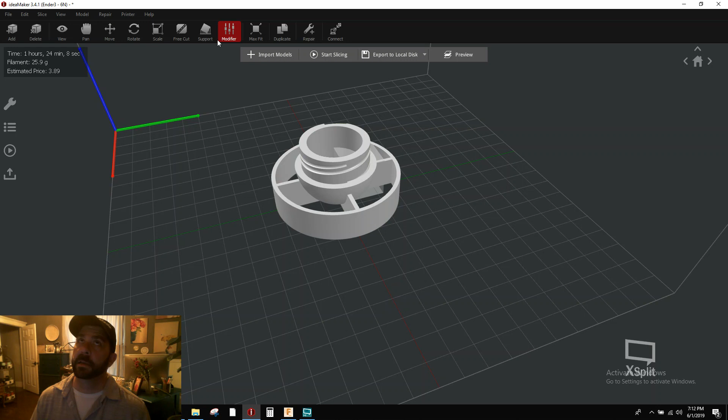One thing we're gonna talk about in this video is this modifier. It's similar to if you come from the Cura world, Cura, whatever they call that thing, I call it Cura. They have that concept of modifiers, and that was their way around doing custom supports. Now Ideamaker obviously already does custom supports, but what the modifiers let you do is apply different settings, let's say of infill, layer heights, or whatever, to an existing model using modifier shapes that go inside your current model.

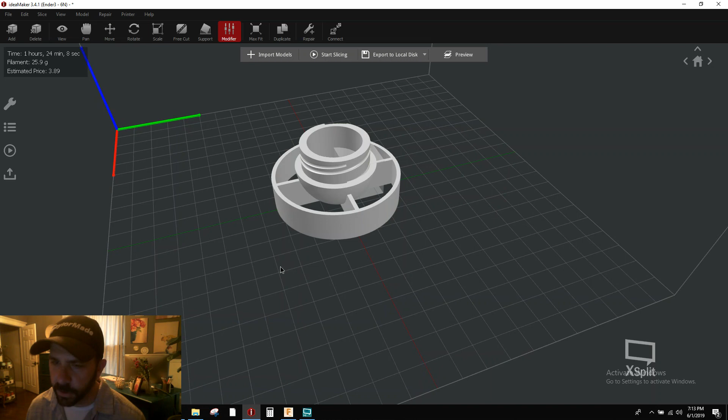So I'll show you this. Let me highlight this guy, let's delete him. So here's this little base thingy I got here, it's for like the bottom half of like a bomb, that screws together. Do I have it here? I don't have it here. Anyway, doesn't matter, this is the model.

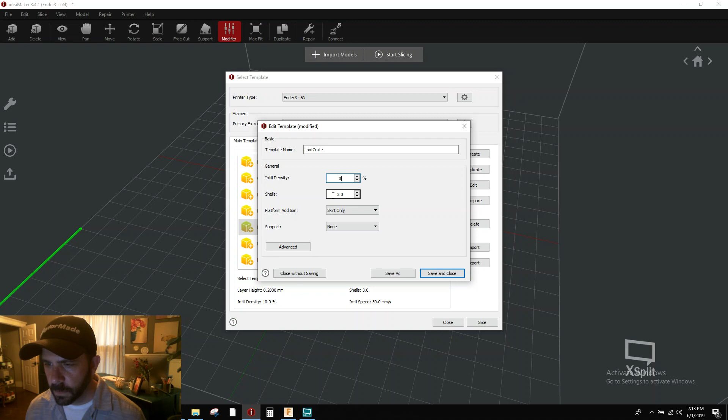So if I were just to slice this and use my standard loot crate template that I've got here, 10% infill - actually let's do 0 infill just so you can see - 3 shells, all that good stuff. Don't care about anything else at this point. I'll slice it.

Let's take a look. So now you can see there's a couple of layout changes as well, we'll touch on those as we go. The preview button is still here once you get your estimated print results, and you can still hit the preview button. The main difference is you don't get the separate pop-out window for your print preview - it's all contained in one, still in your parent window.

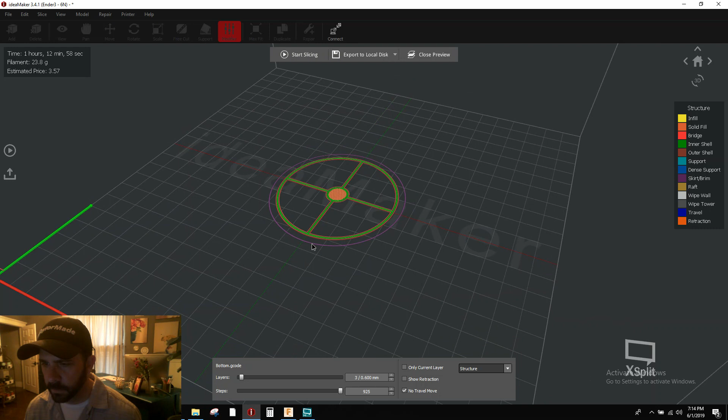So this is what it'll print out like. Again, 0% infill, 3 shells. If we scroll down, you'll see as we get down here, there's no infill there, right? It's just blank, it's just a void, nothing down there, nothing up my sleeve, all that good stuff, okay.

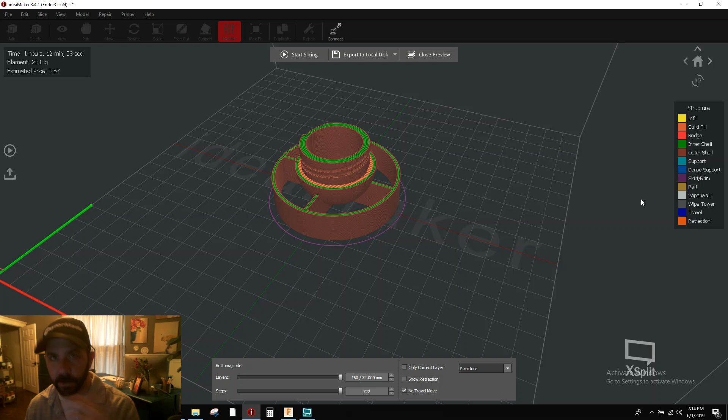So that's totally fine. The other thing you can do here is change the type of view you're looking at. So here we're looking at the actual physical structure of the print, and the different colors signify if it's infill, inner layers, outer layers, support material, all that good stuff - that's what your colors represent. If we change this to your layer heights, this represents which layer height you're printing at. I'm printing this at 0.2 theoretically in this case, so everything is just blue.

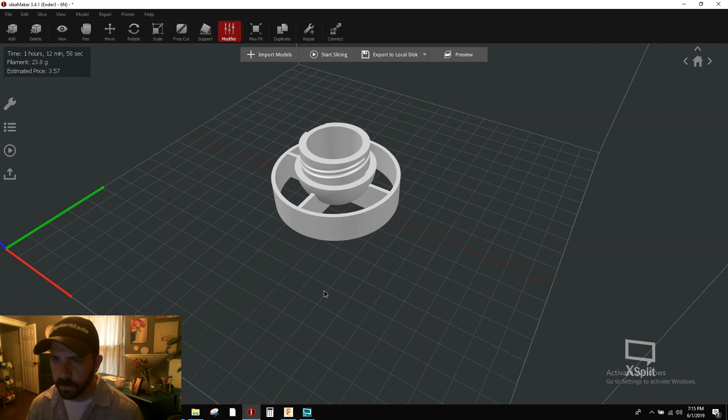Now in the next video when we talk about adaptive layer control, we'll see how this makes a difference. So there we go, we're going to close this for now. And so now what we're going to do is add a modifier. If you come up here, select our model, hit the modifier button, we now have the option to add some modifiers.

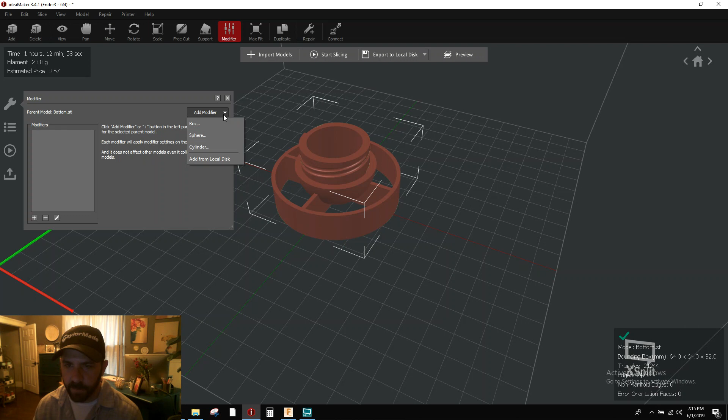You can hit the plus buttons here, and what that lets you do is pick your own STL file to include as a modifier. If you don't want to do that, you can go over here and say add modifier, and add a sphere, a box, a cylinder, whatever you want to do.

In this case, we're going to add a box. I'm going to leave it the default name, and make it 20 by 20 by 20 millimeters. So now it throws it out here.

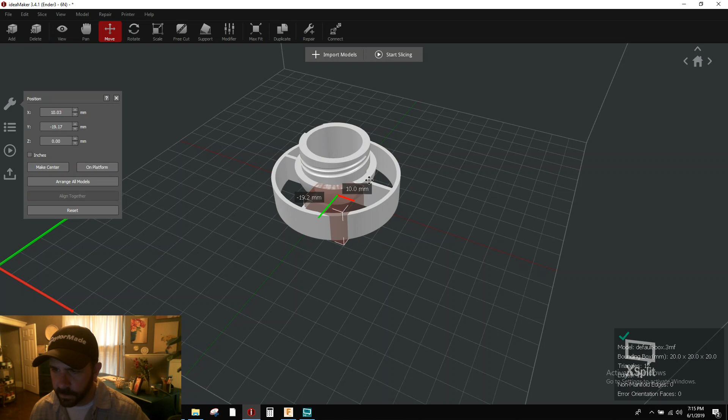I'm going to go to my move button, and I'm just going to drag this anywhere in here. Yeah, that's fine, it's perfect. I'm going to go back to my little modifier settings.

So now the type here is, what do you want to modify? Do you want to modify your support structures, meaning maybe modify them with some different settings, or do you want to actually change the print settings of the parent model with your modifier settings? Where your parent model and your modifier model overlap is where these alternate settings are going to be applied. So you're not actually printing a block in the middle of your part, but whatever settings you apply to that block will translate to your parent model, only in those areas where they overlap.

So we're going to pick this plus button because we're going to play with infill on this one. Infill density is the only one we care about for this example. Right now you can see my initial infill for this model was 0 infill, 3 shell. Let's modify this, and we're going to call this 100 infill.

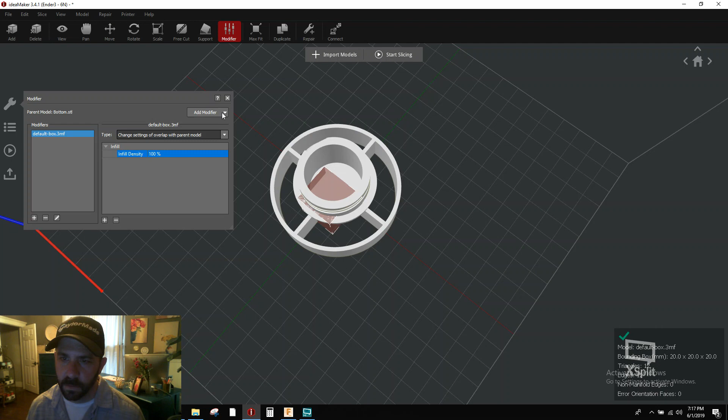All right, so now we got that, and now let's just start slicing again. The slice button used to be up here, they've moved it over here. Start slice, not changing anything else, nothing else to do here.

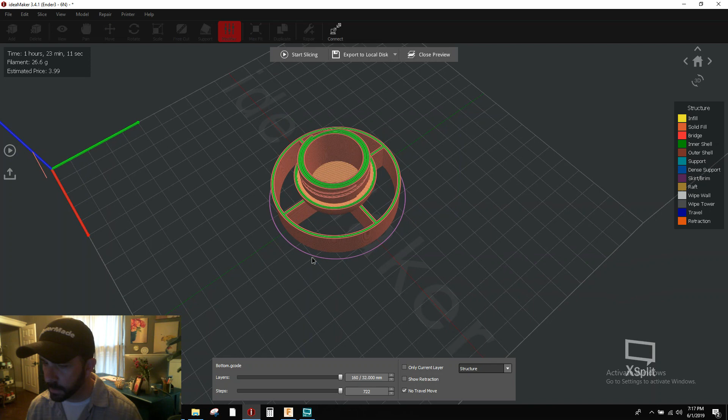There we go, let's look at the preview. So you can see there is no block in here. I mean, we had a block in there as a modifier, but there's no block showing. So if we scroll down, now you can see where the block overlapped with our parent model, and in those areas specifically, you can see it's yellow.

Yellow is infill, so that changed my infill just in those areas to 100%. Okay, so there you go, this could be useful. We used to have to do this at a whole layer setting, where you could change your infill percentage at a certain height. Now you can do it for a very specific part of your piece. So let's say you had a statue and you wanted to do 100% infill all the way up the side till you hit the arm, but have everything else hollow, you could do that.

So there's your modifier setting, sort of a quick tip. Just send this off, slice it, send it off to a USB card or your printer, and go from there. We'll do another couple of videos here shortly, but there's one of the new features they've added.